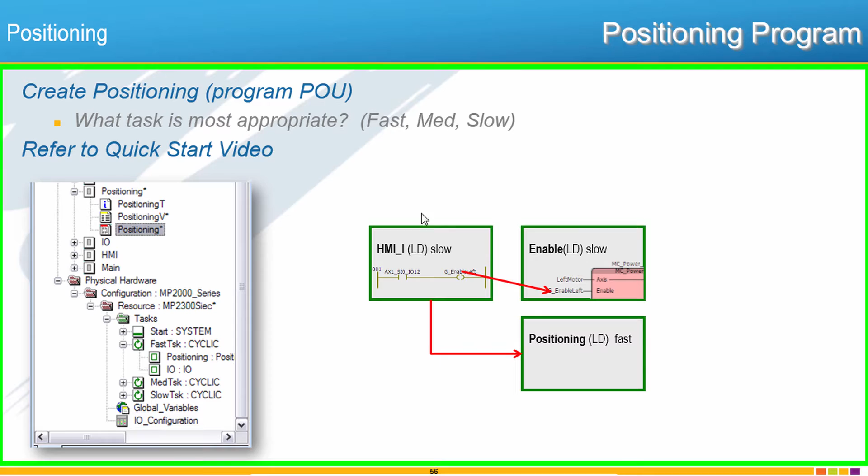Now in our case, the slow task would also be fine since the execution is going to be coming from this HMI running in the slow task. So it could go either way, but we'll put it in the fast task in this case, as that's usually where it will be. So here I am connected to the demo.

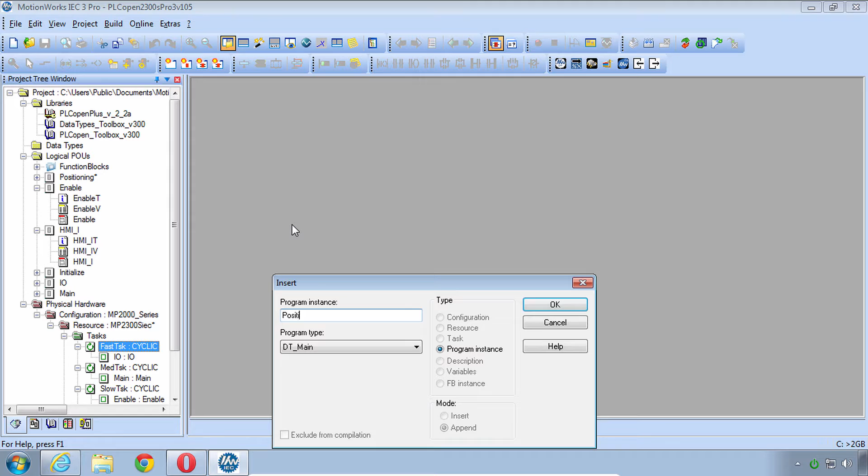So we'll make a new POU, a new program POU called positioning with the ladder language. And I said we'd run it in the fast task. So got our program instance, positioning, and let's open that one up. I got my edit wizard here with PLCopen Plus.

Now the move profile that we'll just somewhat arbitrarily select will be a distance of -270 millimeters with a velocity of 180 and an acceleration here as listed 360,000. Remember, this is the screw axis. We're working in millimeters per second for velocity, and millimeters per second squared for accel and decel. That is the way PLCopen units work. It's the unit per second, and per second squared.

And so we'll expect to see our motor do this, 270 degrees clockwise. So if you'd like to try this out, go ahead and pause the video, and I'll show you my solution right after that.

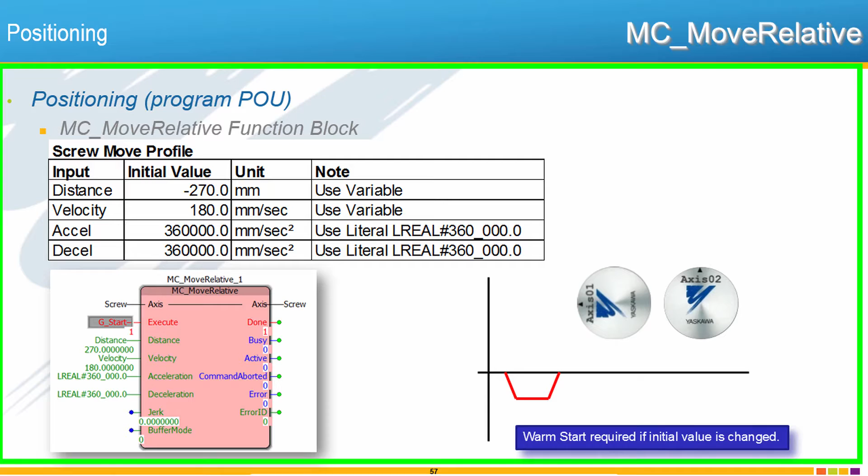So I'll put in an MC move relative on the screw axis. And for the execute input, we're using G start. And now we need to make some local variables for distance and tab down here to the var usage. Now, you could leave the initial value at 0 and just type in the value in debug mode, but let's give it that initial value, -270.0. This is an LREAL, so you've got to have the decimal point.

And move on to velocity. Call a new variable velocity. It's a var with initial value 180.0 and enter. Now accel and decel could also be variables, but I'm just going to use a literal value here. LREAL pound, and it recognizes that, grays out the rest of the fields. 360_000.0. The underscore, again, is just there for formatting, so it's easier to read that that's 360,000.

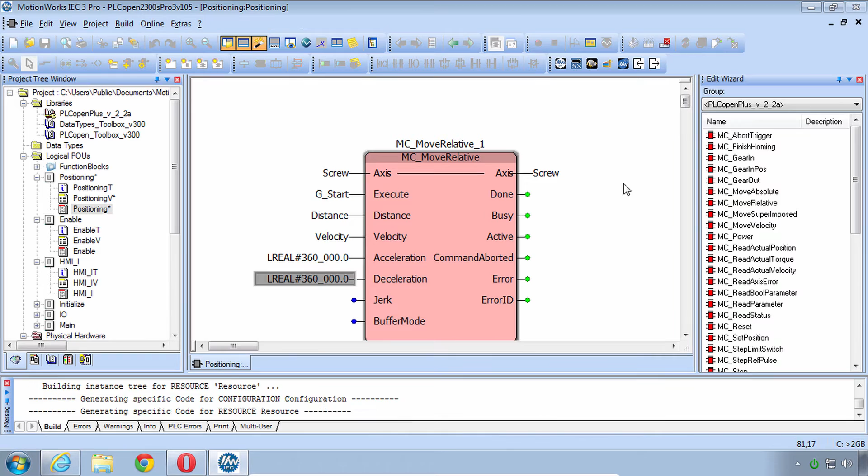And one little trick here, you can control click to generate a copy. And we'll download that to the controller. Okay, we'll see if it works by opening the HMI POU. I don't have a lot of room here, so I'll use this. Go to debug mode. Go to toggle Boolean mode.

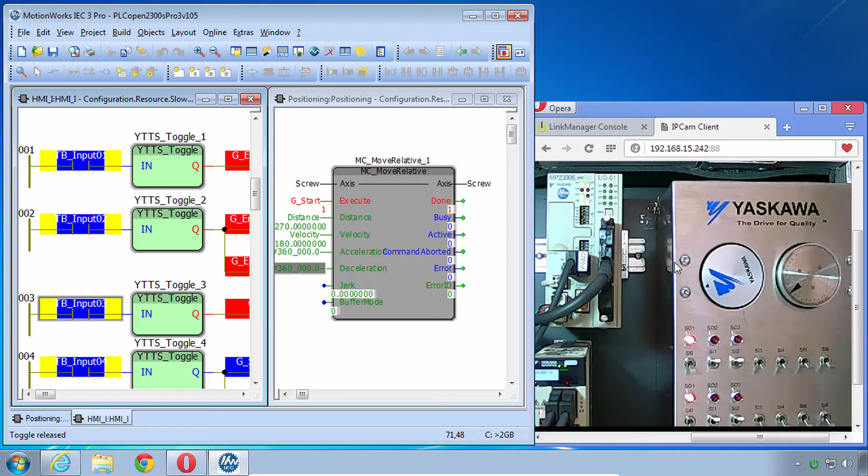My servos are on, so I just need to start. I'll zoom out a little bit just so I can see it. And here we go. I'll do it again. Off and on. Now it is going 270, although I'm not starting really at the expected up position, just because I happen to be somewhere else, and that's what relative positioning is. It's relative to where you are.

I'll do one more time here. Off and on should be right about there. Yep. So that's an MC move relative. But before we do an absolute move after this, it kind of makes sense to put the motor to what we might call absolute position 0. Now that is an arbitrary position, but I would like 0 to be with the motor arrow pointing straight up.

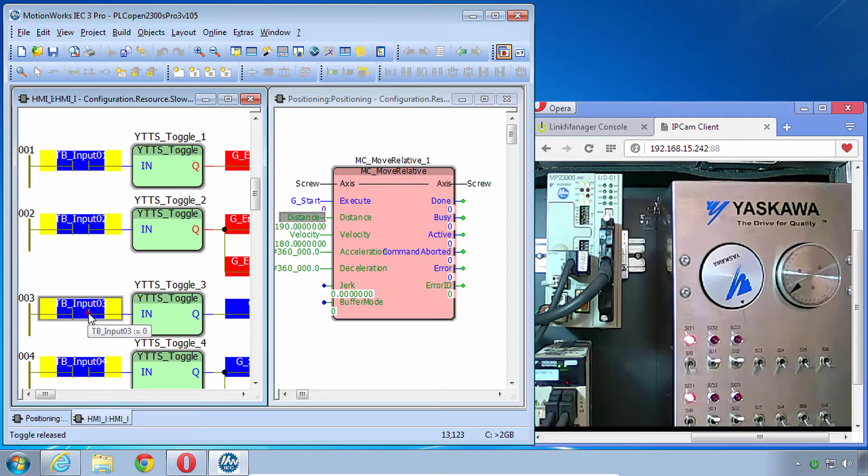So I think the easiest way to do that is to incrementally change the distance of this relative move. For example, I think if I go clockwise, maybe not 180, but maybe 190 degrees, I'll end up at 0. So I'll just change my distance to negative 190.0. See how close I get. Turn that switch off and on. All right, wasn't quite far enough.

What do you think I have? Maybe 5 degrees more. So change my distance here to negative 5. Toggle that again. All right, it doesn't look perfect, but it looks pretty close. Negative 1.0. I think I need maybe a little bit more and could inch it along here.

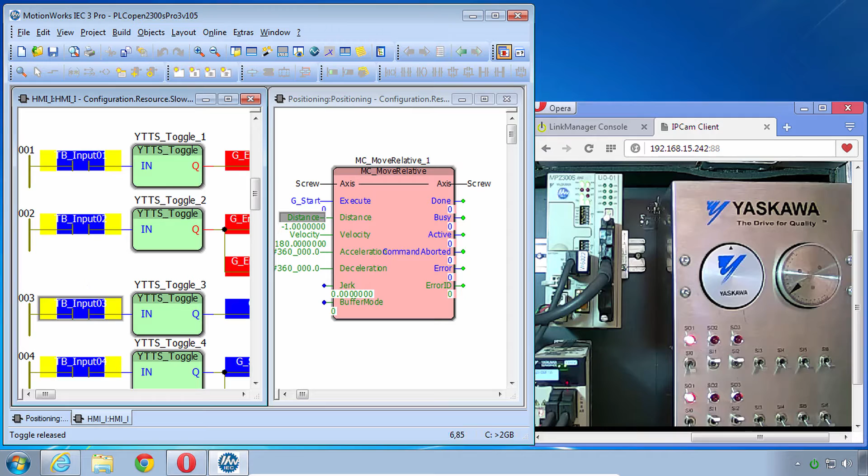Until it looks perfect. All right, I think that looks pretty good. And now I'll get back to my program mode here. Off to the side, let's see where we're at with an MC read actual position for the screw axis. And you can just arbitrarily enable that to true.

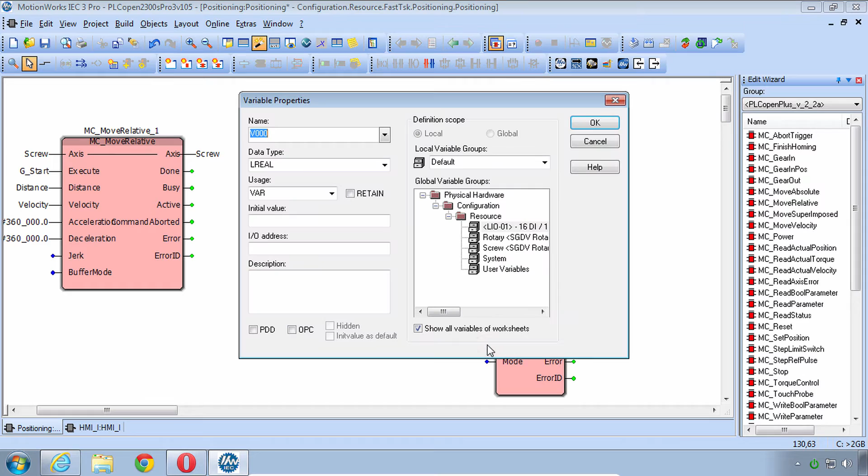This is the way that PLCopen reads in actual position. And to set the position, we'll do MC set position, also for the screw axis. And we'll just execute this straight within the code here. Call it set 0, a local variable. And the position will be called 0 position. And I'll leave that at LReal 0.0. That only makes sense.

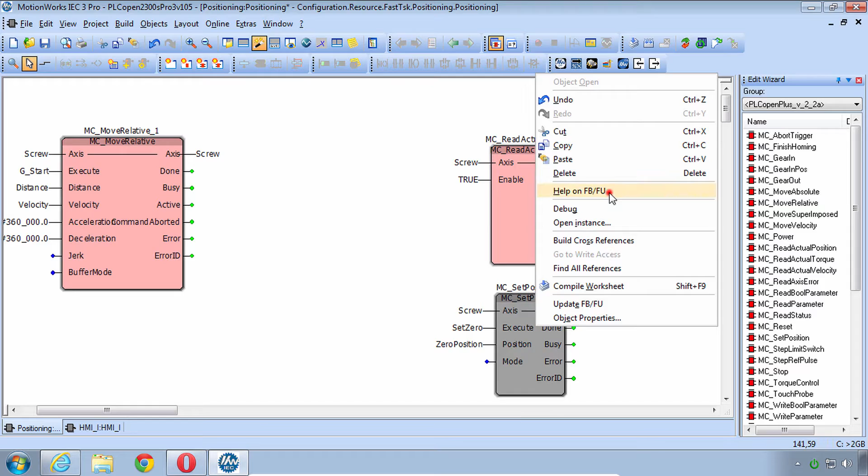This mode in the help shows that mode is 0 for absolute, which means that's the absolute position, or relative means that you'd add that position. As it says down here in the notes, if mode is false, the position input is treated as absolute, and the axis position is defined as such. If mode is true, then the value of the position input is added, the sum of which becomes a new commanded position without any motion occurring.

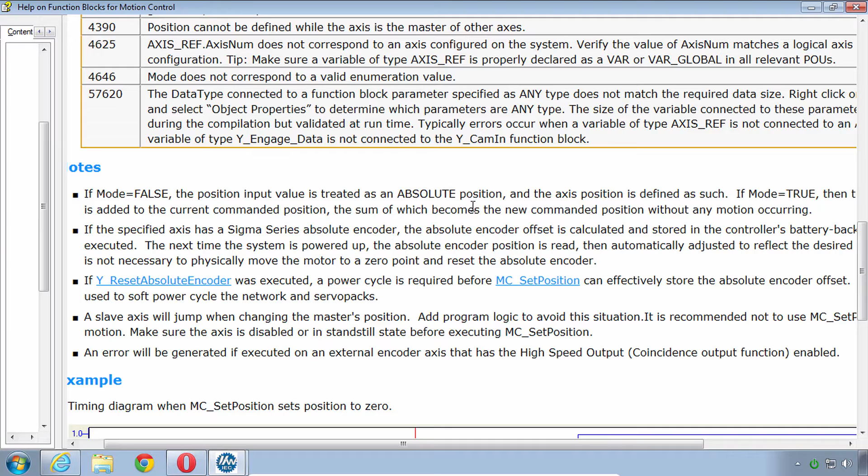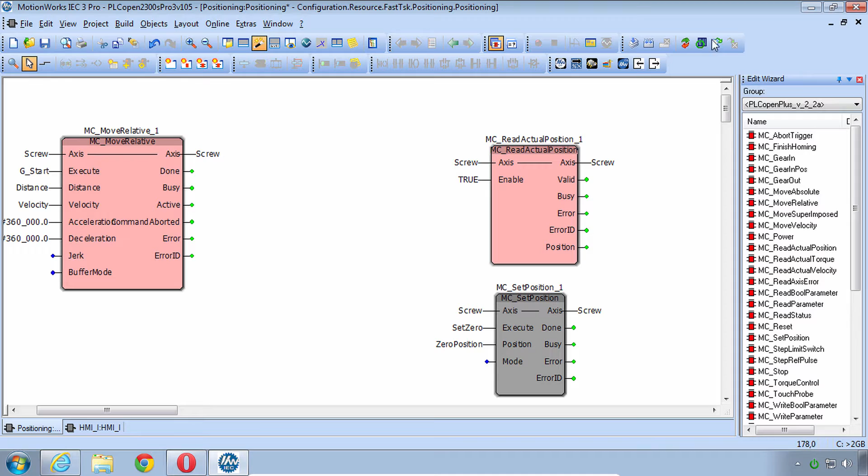So you can jump your position up with this set position without moving. That's not what I want to do. So we'll leave this in absolute mode 0 just by leaving it disconnected. Now I'll download changes and close that in debug mode.

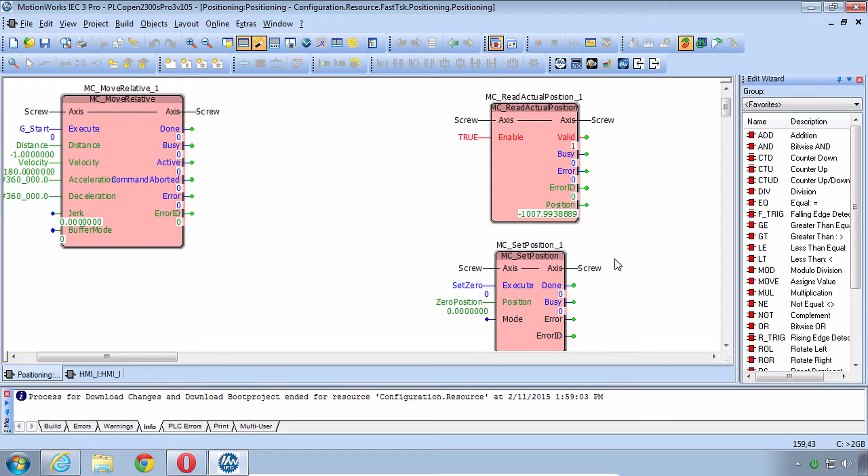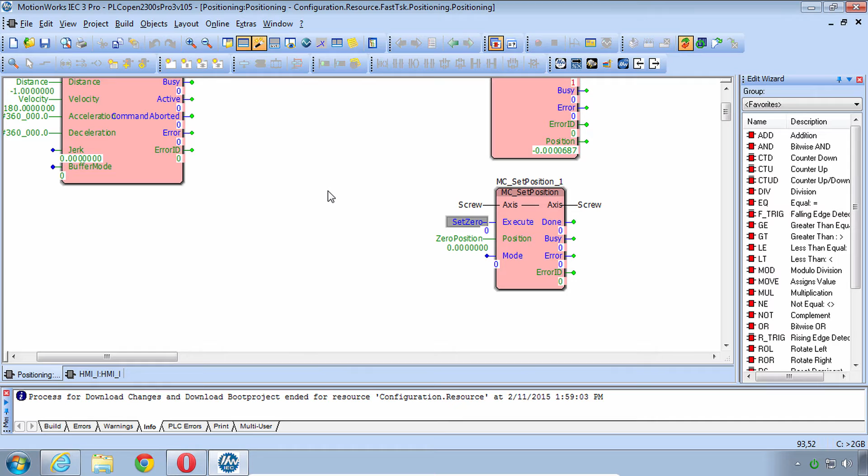So now we see the feedback position after several of those moves. And when I set the 0 position, just double click on it and click overwrite, the position becomes 0. And I'll release that one. Now we have 0 with the motor at this mechanical position.

Now let's continue with this move and make it into a move sequence. So what I would like us to do is, after this relative move of negative 270, can we do an absolute move back to 0? So the motor will basically move out and then move back immediately. So if you think you know what to do, go ahead and program this, and I'll give you my solution.

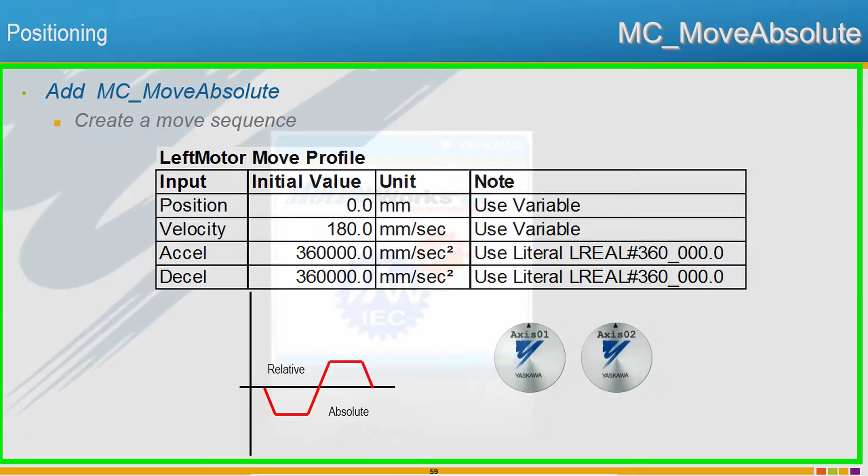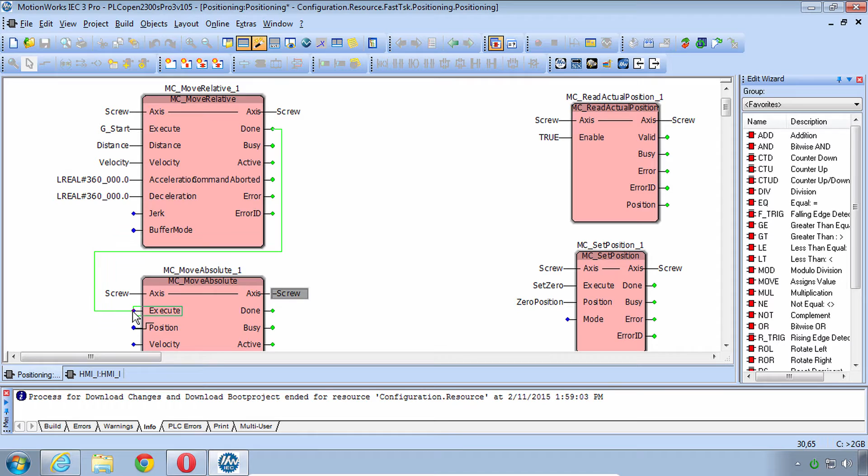Okay, let's add a move absolute, MC move absolute for the screw. And you can do it two ways. You can either take this line and connect it, which kind of makes you want to work horizontally. So since we have gravitated toward a vertical layout, what I usually do is don't use these lines. Instead, I'll just create a variable called done screw relative. And then with the control key, I can create a copy of that. And it just looks a little cleaner.

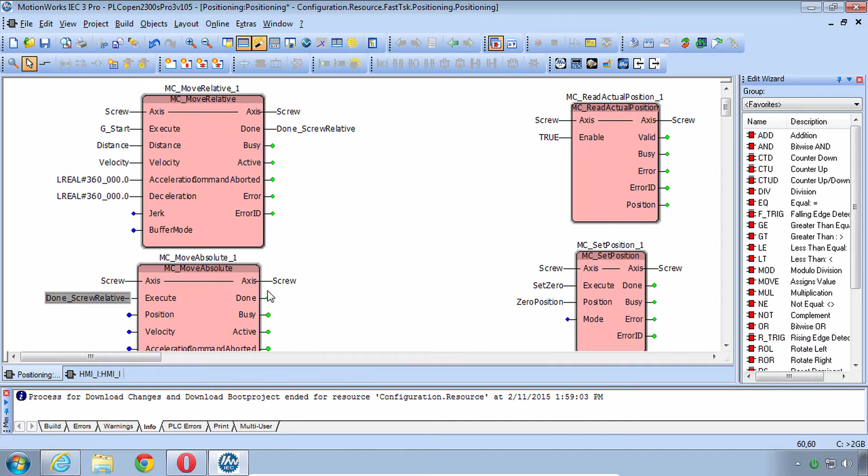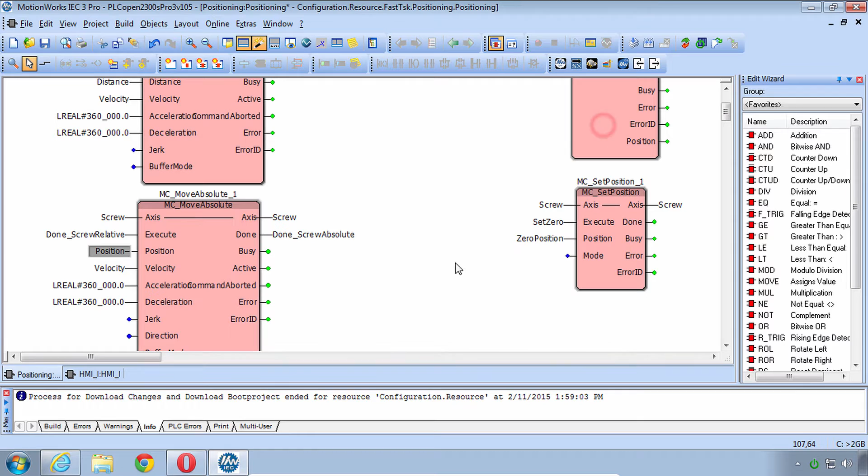And then this will be done screw absolute. Another trick here, I'm using the same velocity, accel, and decel, so highlight those and Control click to place them on, and I'm left with position, which I'd like to be 0. So download changes, and we'll start motion again.

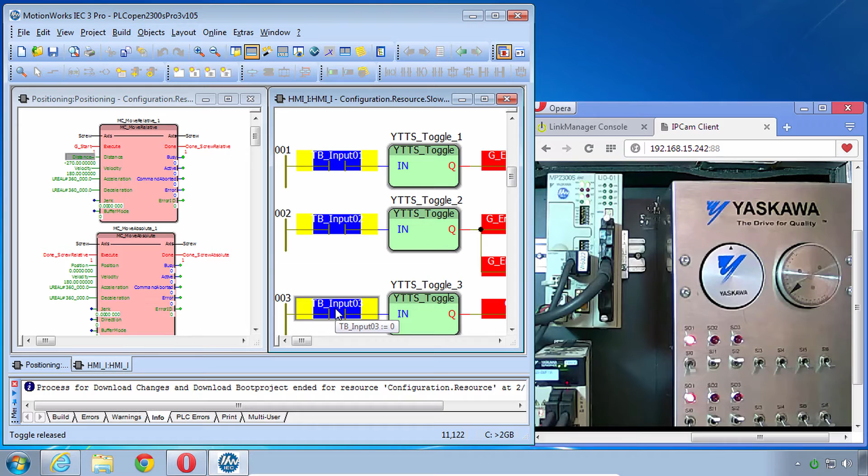Set my distance back to 270. Off and on. So it goes out and back. Do that again here. Out and back. And you could look at the position during that time. Out and back. And here's my partial solution, just for the record.

Now, the next thing I'd like to add is there's a way to get this type of sequence to repeat with timers in between. Well, let's take a TON timer and put a delay time in between. By using this normally closed contact with the same variable as the last done of the sequence, we can cause this to trigger the move to happen again by putting it in series with the start. So again, if you think you know what to do, go ahead and try it, and I will show my answer.

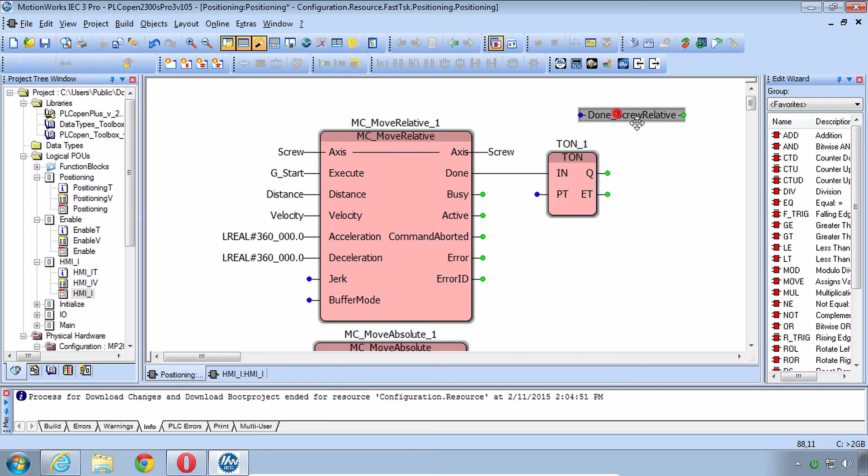Okay, here's how I do it. I'm going to use the Shift key to take the done off. And right on the done, I know the name is called TON. And it'll just nicely put it right on there for you. TON. PT, that's the delay time. I'm going to call that delay. And we'll give it a T#500ms, 500 milliseconds.

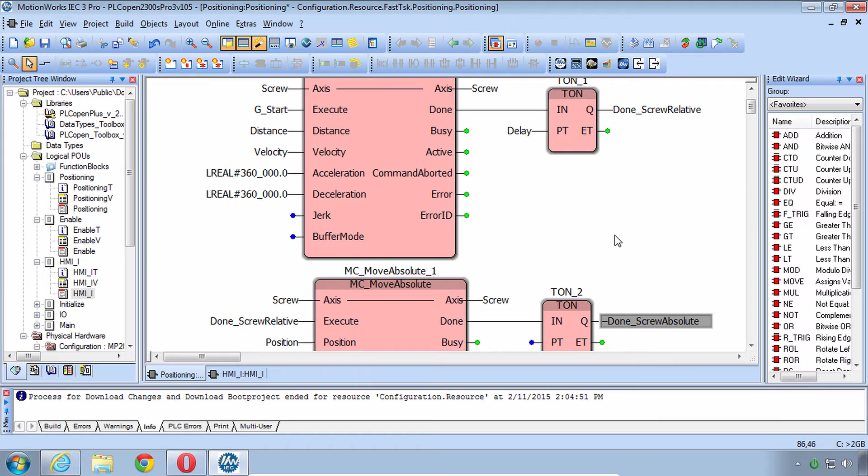And we can do the same thing for the move absolute, create it from scratch. Use Shift here to remove it. You could also copy and paste, but then you have to be careful how to do that properly. So I think it's easier just to create it, TON number 2. There's the done for the screw absolute. And delay. Now I did this out of order relative to the illustration, but I will delete here the G start

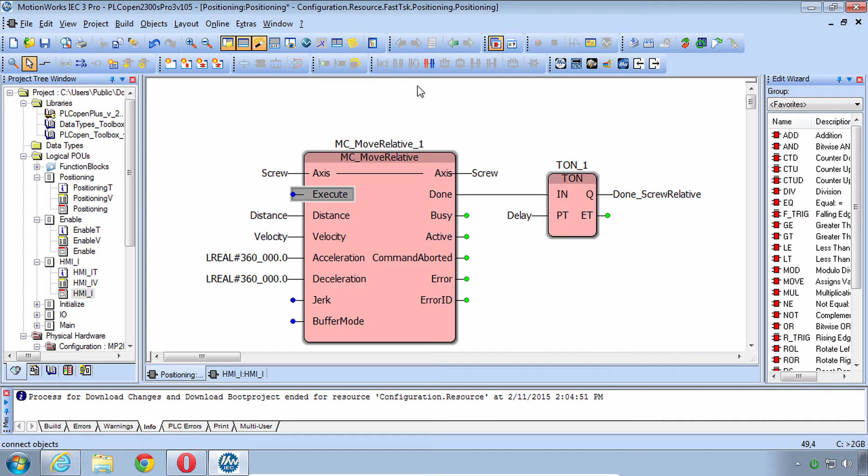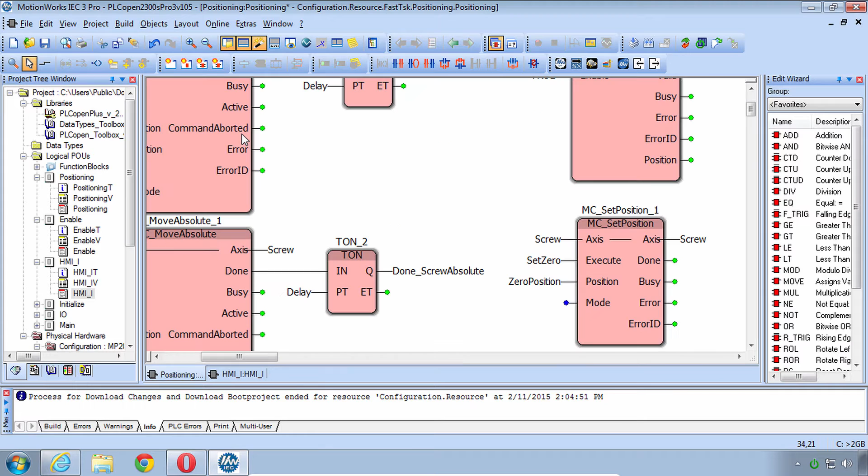and put a contact left, another contact left, and then the left power rail. Notice that kind of shifted everything over. So if that bothers you, you can zoom out, capture it, line it up. Control question mark gets you back to 100%. Normally closed. This is going to be done screw absolute. And this was the G start.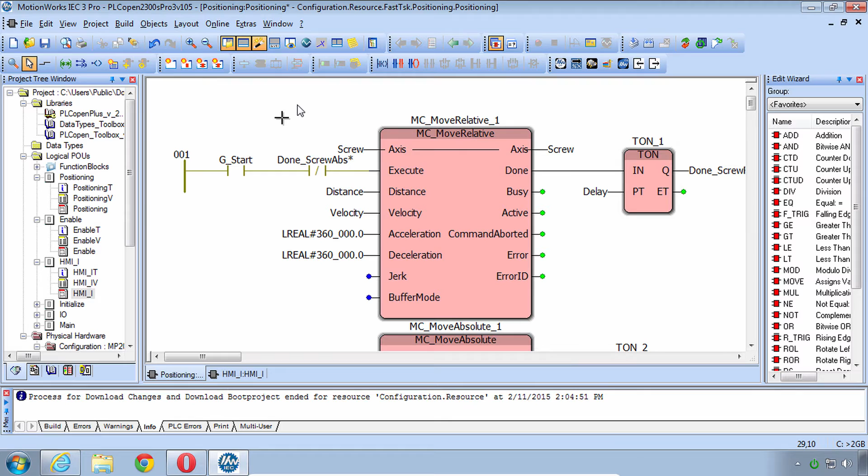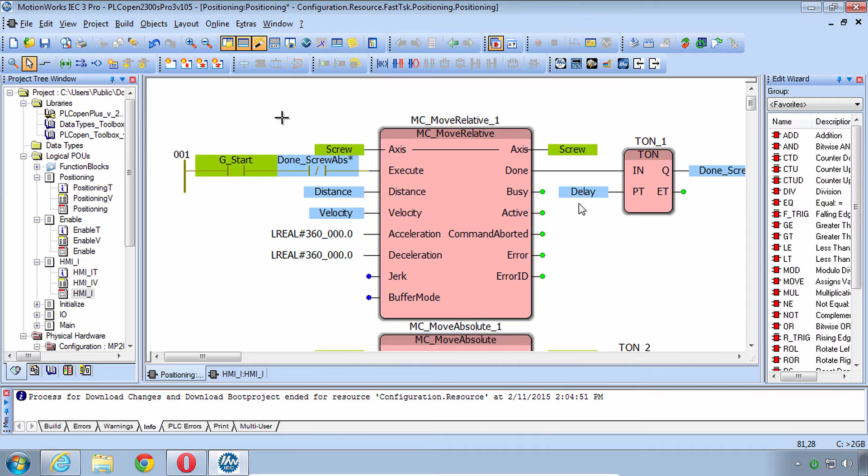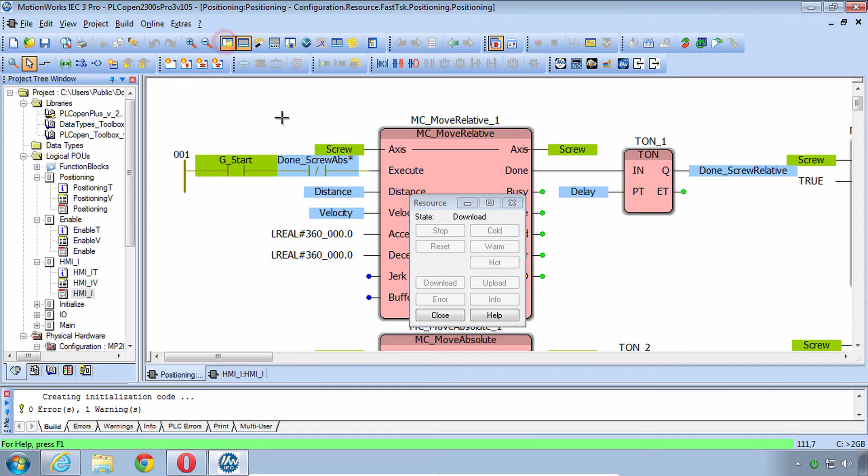Since we're starting to get a few variables here between local and global, I will remind you, if you haven't done it yet, under Extras, Options, Graphical Editor 2, there's the Show Borders option, which puts different color shading on the globals of green versus locals blue. Sometimes that helps. And let's download changes again. And you can see it's working already.

Now in debug mode, can keep an eye on this feedback position. You can see it gets to 270 and 0. Saw 270 there.

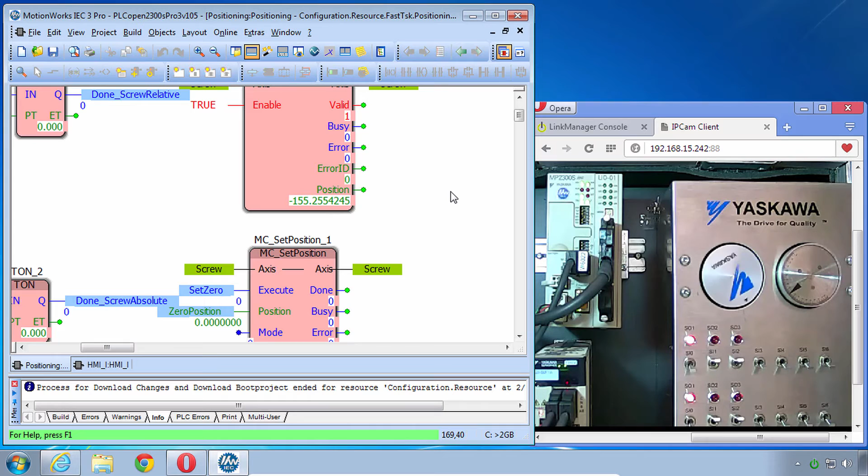So here is your final programming challenge. We haven't done anything yet with the rotary motor on the right side of the demo. So let's have it so that the screw does a negative relative, and then the rotary does a negative relative, then the screw does an absolute back to 0, and then the rotary does a move back to 0. Look like this. I did it in PowerPoint. You do it in PLCopen.

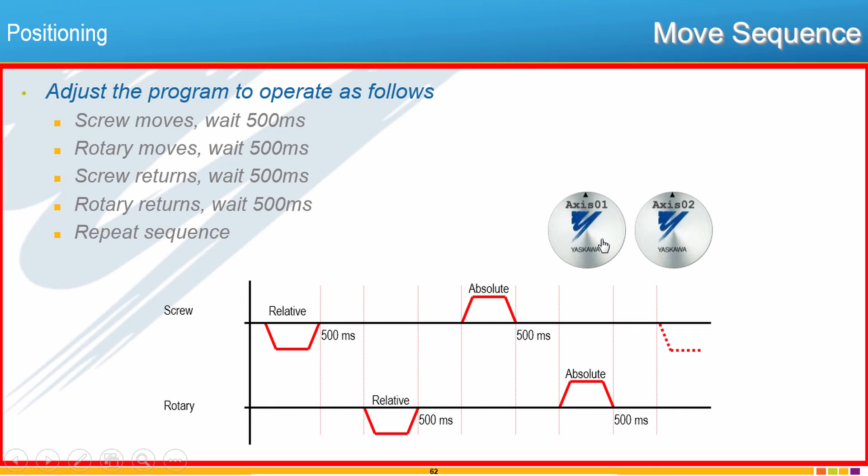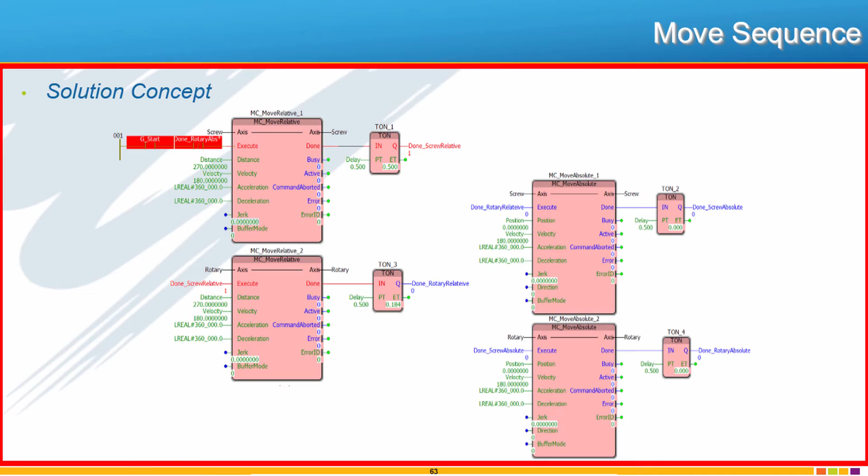Here's the solution concept, and I'll show you how I went about doing that click by click. So I think it makes sense to put the blocks in the same order that they'll be executing, just to avoid confusion. We need to have the layout auto scroll speed to slow. That'll take care of that problem. So make room for another MC move relative.

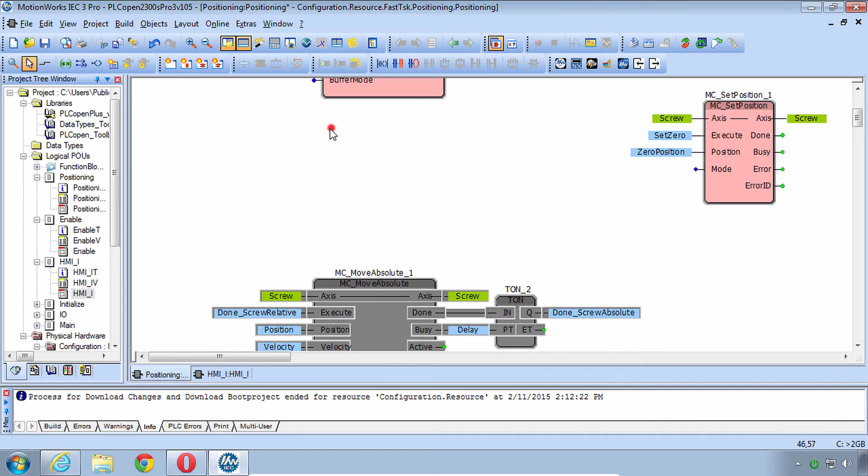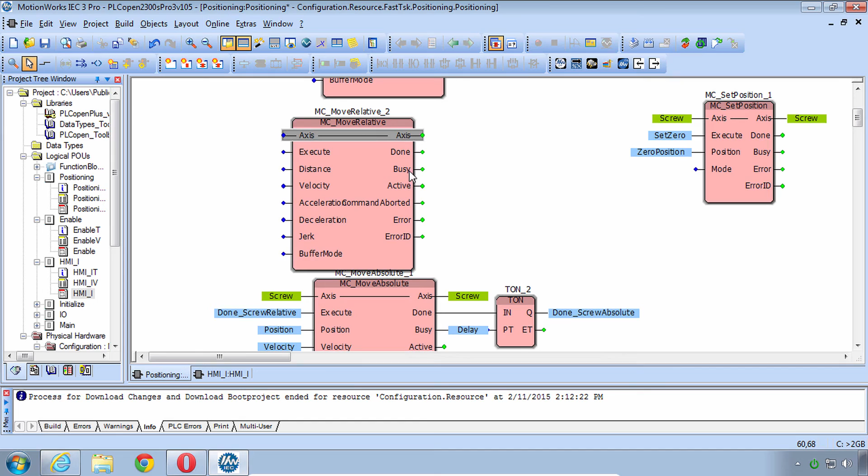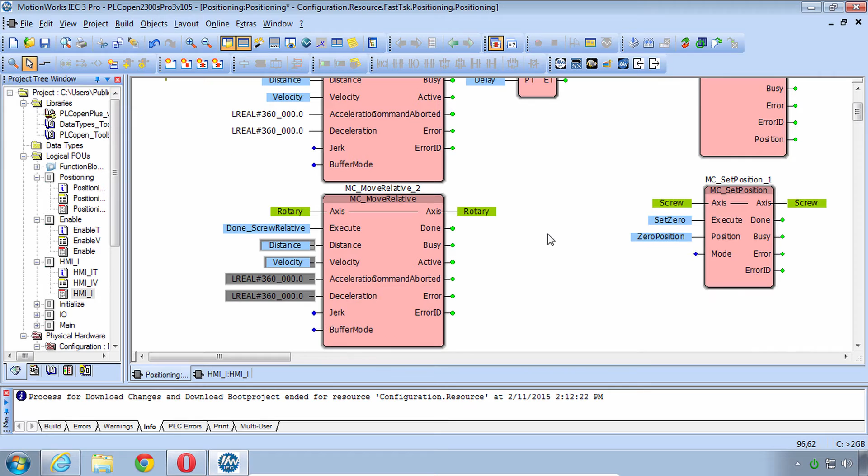Not enough room. Okay, let's try again. All right, there it is. Build it again. This time it's the rotary axis. And we'll be executing with the done of the previous block. We'll use the same distance, velocity, accel and decel, using the control key. We'll put a TON on. Sometimes these TONs mess up, but you can usually fix it.

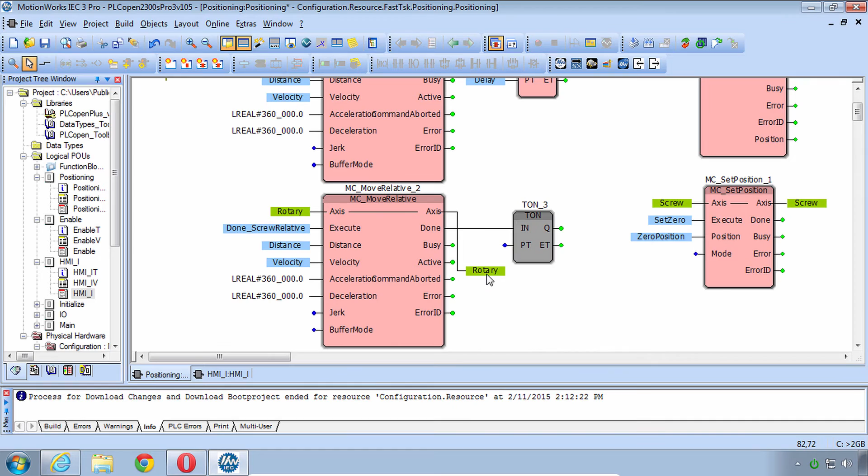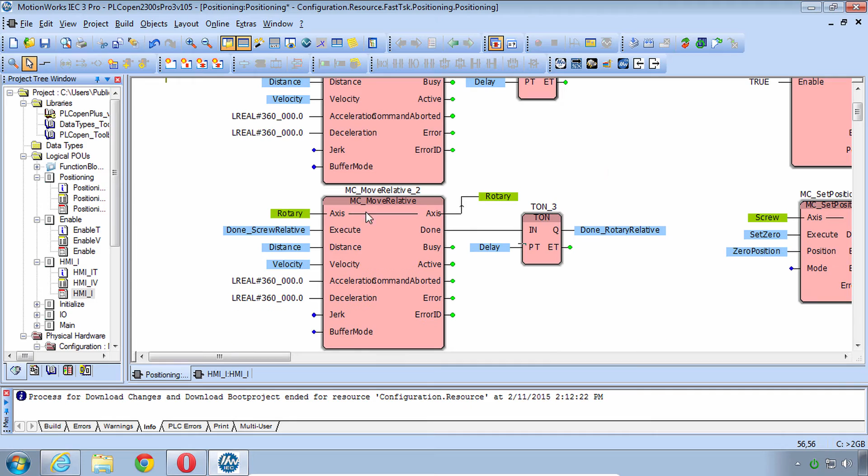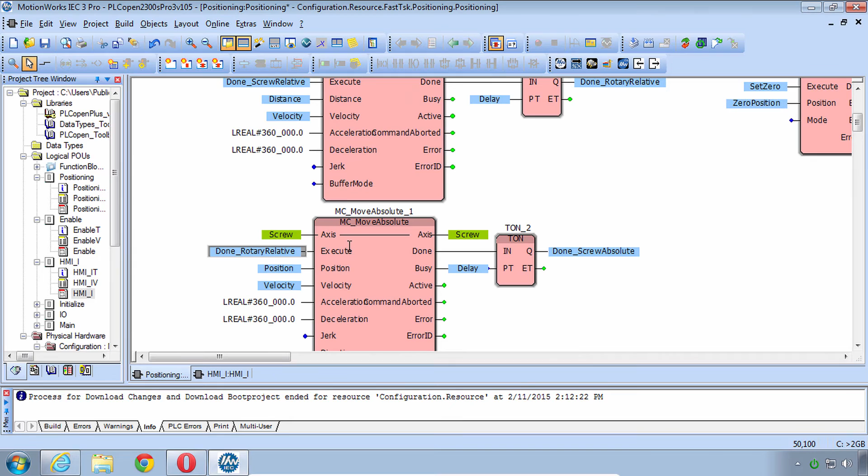Move that one over a little bit. We got done rotary relative. And use the same delay. So let's follow that through. We've got G start. This is done screw absolute. This one's going to have to change too. We'll do that later. Done screw relative starts the rotary relative. Done rotary relative should start the move absolute. So we'll change that one. Here's done rotary relative. Screw absolute.

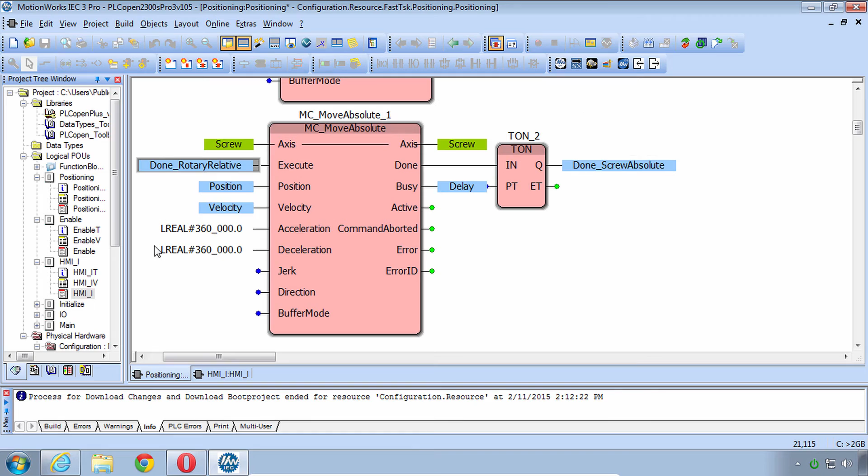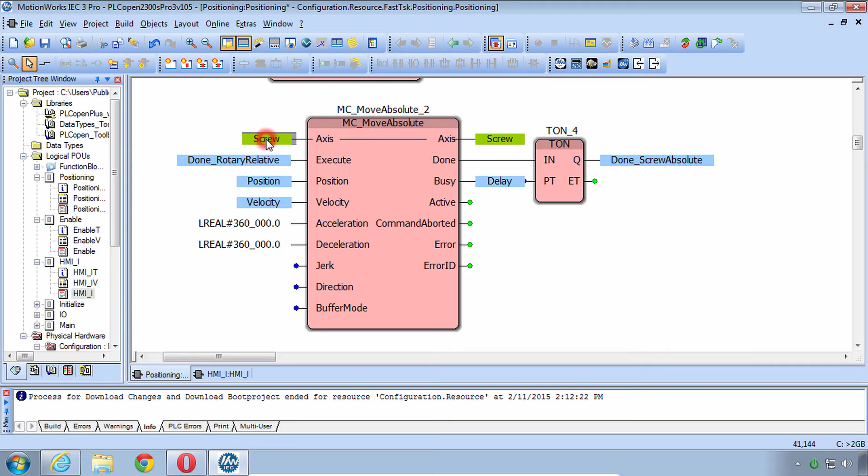And now I'm sure some of you did this with copy and paste. It seems like a lot of work to rebuild it. I usually don't do too much copy and paste unless it's a lot of code. But I'll show you how to do it the right way. We copy and paste. Now we can try to fix this up. We know that this is not the screw but the rotary. And we know that this is done screw absolute. Let's change that. Done screw absolute. And this will be done rotary absolute.

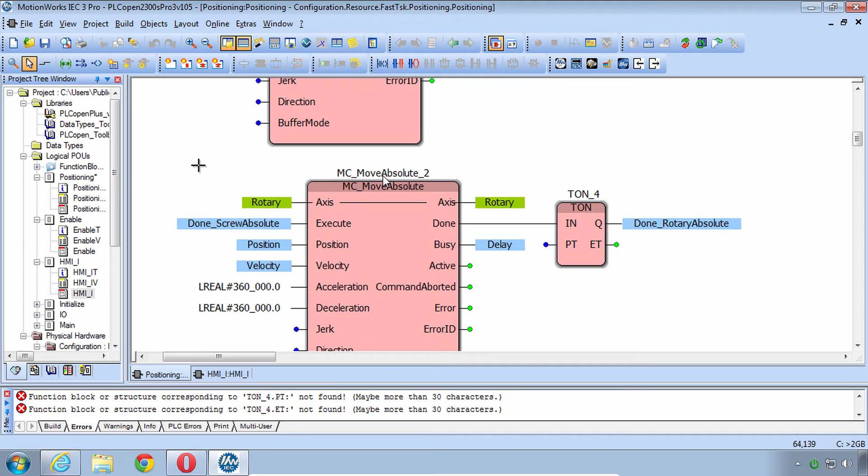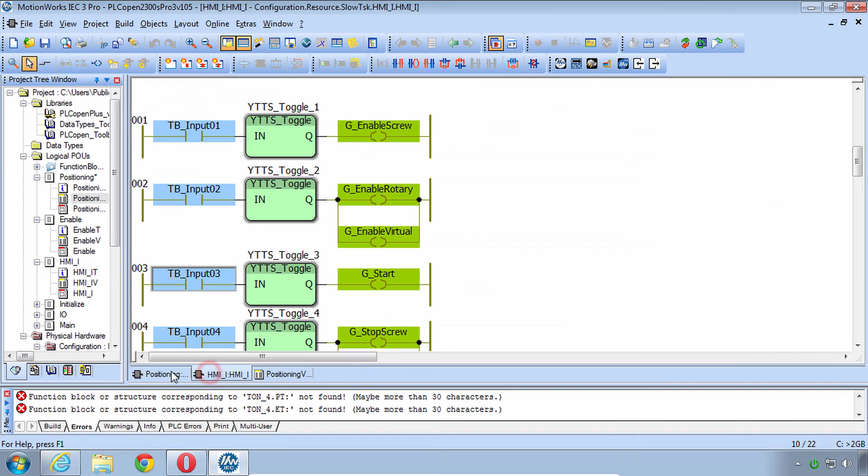When you paste a block, you have to confirm that and declare it. You double click on it and click OK. And doing that puts the instance in the variable list. So copy paste can work, but every block, including the TON, must be confirmed so that it ends up in the list.

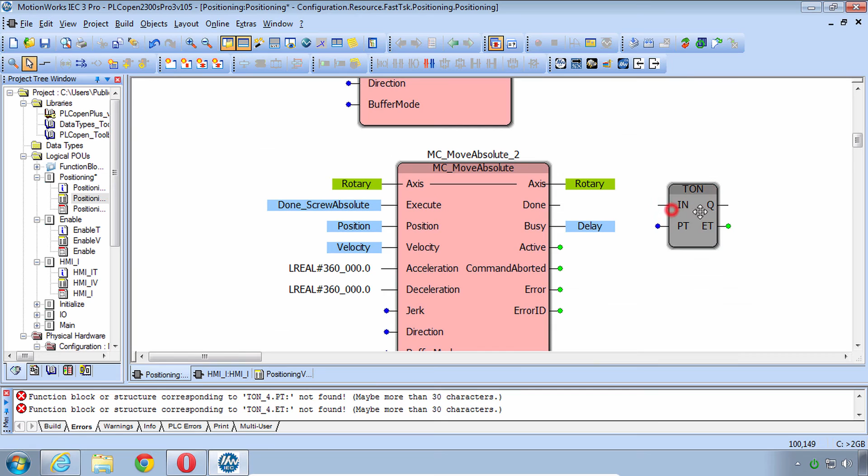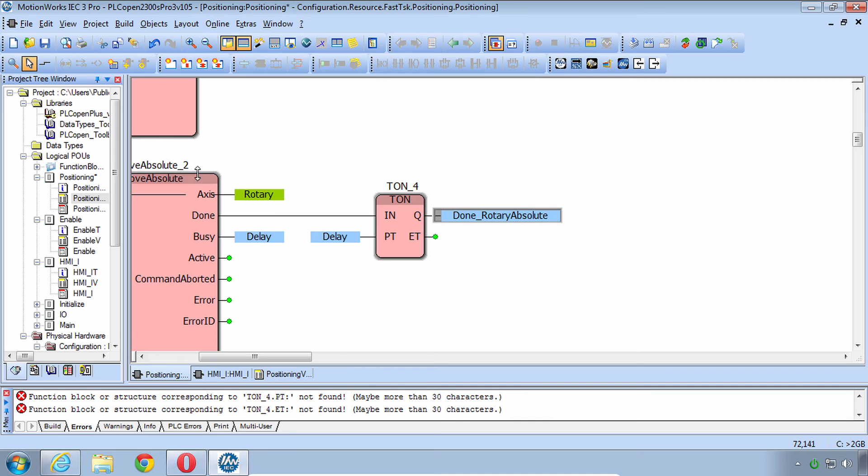Okay, add a couple more things here. This PT needs the delay. And done rotary absolute. This is another common mistake I see. Done rotary absolute should be what triggers this ladder. This up here should be done rotary absolute. Okay, so change that one out. And now it'll work.

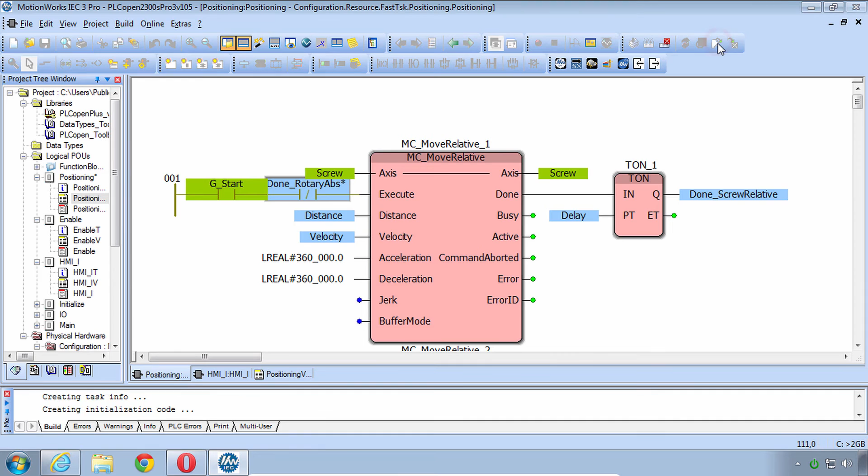Download changes. Ooh, I got an error. Bool type time. Oh, it didn't put it in the right spot. I'll delete that. Delay. Try again. Still got an error. Still think it's there. Interesting. Try this again. Delete it. Check delay. Delay is time. Download changes. Okay.

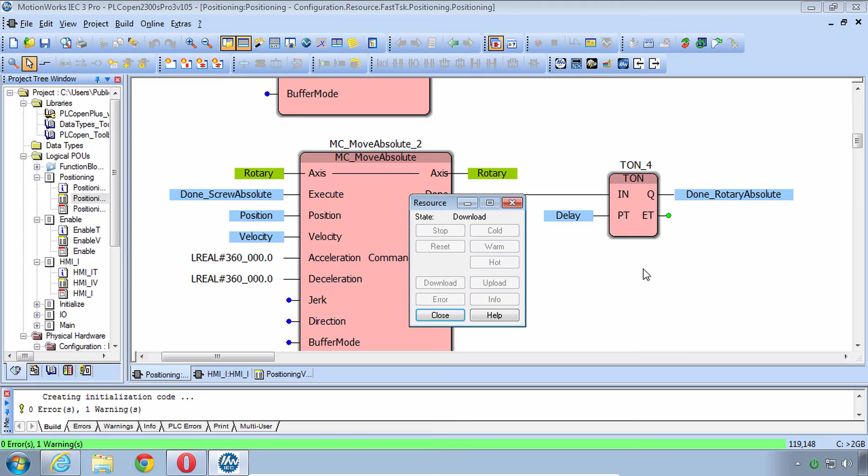And you can see here it didn't even have to trigger anything. The left motor is moving, the right motor is moving. Naturally, if you have the MP2600 IEC, you only have the one motor, and the other motor is like a ghost motor, the virtual motor. It will be going through the virtual motions of the positioning move, but you won't actually see anything happening on the demo.

I'd like to make one final comment, which is notice the execution turns red here and follows this sequence. And so it's the fact that this execute input is turning on and the done output turns off, which is the whole reason that this sequence can repeat. So if you were to turn off the start, first of all, notice that it completes whatever move it's on. I'll do that again here. So we're doing the right motor and it stops, but it completes the move.

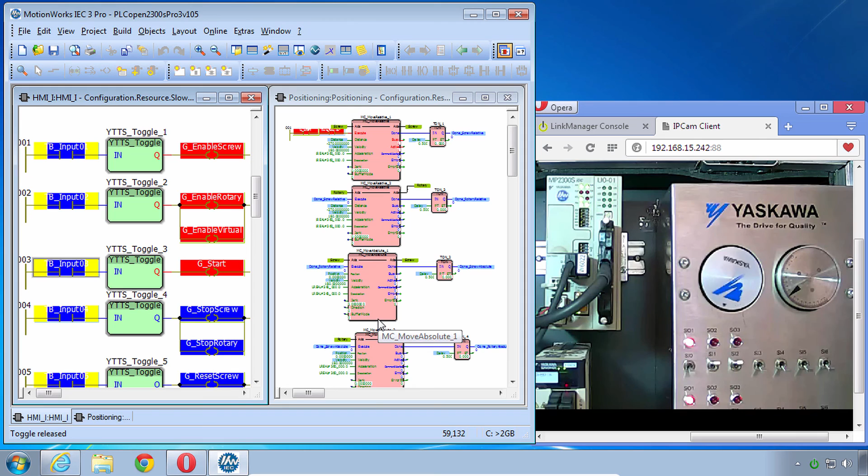And then if you turn that on again, it just starts over at the beginning. So this is not a pause resume button. It basically cancels at the next block and then starts over. And of course, the secret to it all is this normally closed bit that very quickly turns off and on. You really can't see it here, but this is just one way. I'm sure there are more elegant ways to make a repeating sequence, but this is just a very quick and easy way to do it here in the training class.

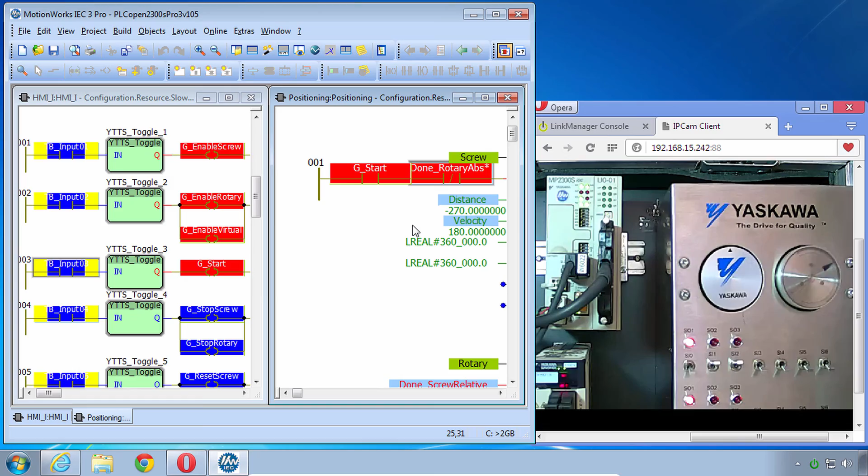Now, as a final wrap-up, I'd like to show a way that you can save what you have here without changing the project name, which is important if you want to continue using download changes, but you may want to save a copy. Save a copy here, save project as, and then in your projects folder, you can just rename it, and I'll call it 06 MC Move. We're using the MC Moves. And that's the name of the video that we just got done with here.

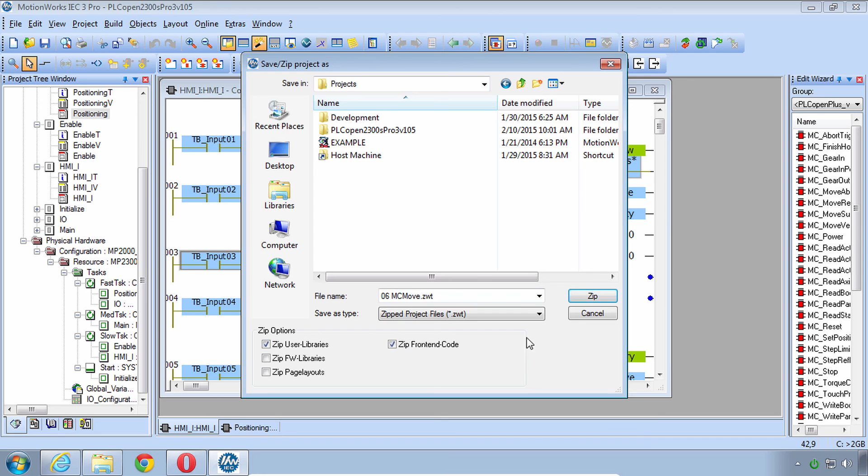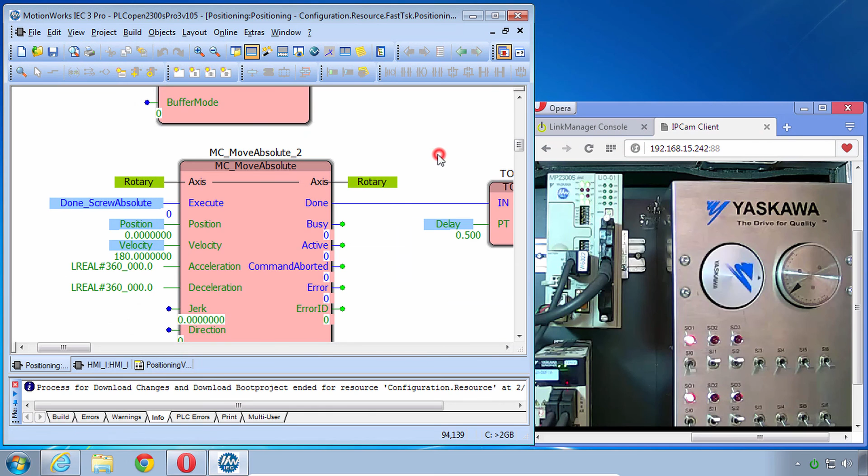And choose zipped project file and zip it. The name of the working project file is retained, but you have in Windows now a copy of it, and you can always unzip this and work with it again. So that's some basic positioning. This is our program, and I hope that that helps you. A lot of applications can be done with just simple move relatives and move absolutes.